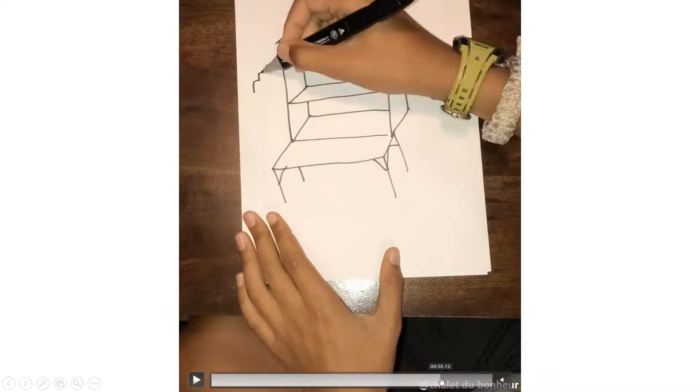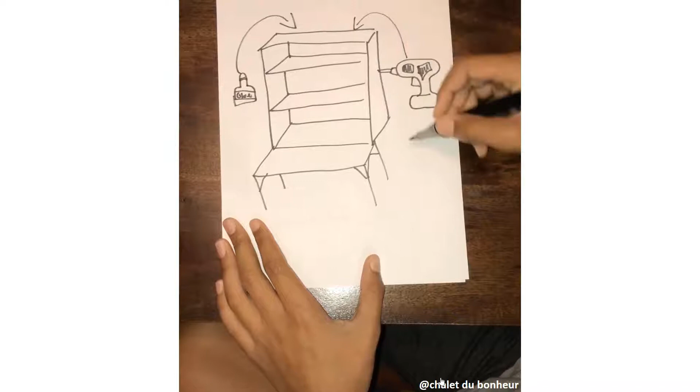Say you bought a new house and it is now time to unpack. Would you place objects that you often use or that are heavy there? I guess the answer to this is no. If I could read your mind, I guess the answer would be no. And the reason is because based on experience, you know that's not a good idea.

Well, then something pops up in my mind and I kind of wonder why we do see this type of situation happening today on workplace design in manufacturing lines and assembly lines. We do see this today, it's still there.

On the left side of things, if this happens to you at home or in the activity that you do, most probably what's going to happen is that you get a slight discomfort and move stuff around. But on the right side of things, that's a bit more serious because it's a situation where there's a high chance of developing musculoskeletal disorder, and that's a lot of money in terms of direct cost. The amount there is for the US only, so it could be up to $20 billion a year to cover the cost of musculoskeletal disorder.

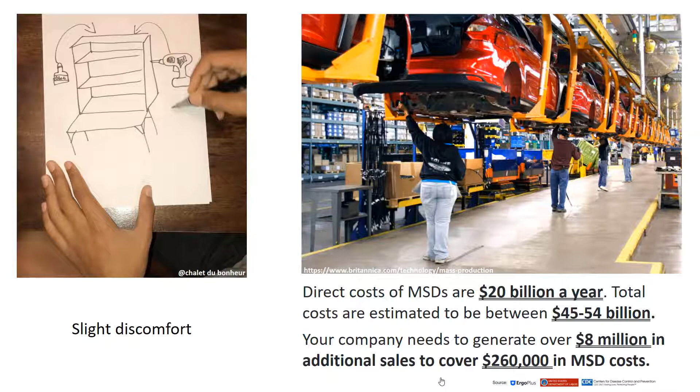So the stakes are high on the right side of the screen. And just to cover for a $260,000 MSD cost, your company, for example, would need to generate over $8 million. So that's serious, and there's something for this, there's a domain for this. It's called ergonomics, and I know most everyone listening to my presentation now, you know this.

But then to the point of asking yourself, or maybe you are, or I know I was thinking, well, why isn't ergonomics accessible while in design? Because this stuff would be caught if we would know this.

So let me tell you a story. Something happened, I did get an idea in 2012, a while back. I was supporting our actual product, and I was meeting a lot of users, and I would see them use our software. And to answer this question, why isn't ergonomics more used or available in the design, two problems popped up in my mind. I just saw them, it kind of clicked, and I understood we needed to tackle those two problems if we wanted ergonomics to be part of the design.

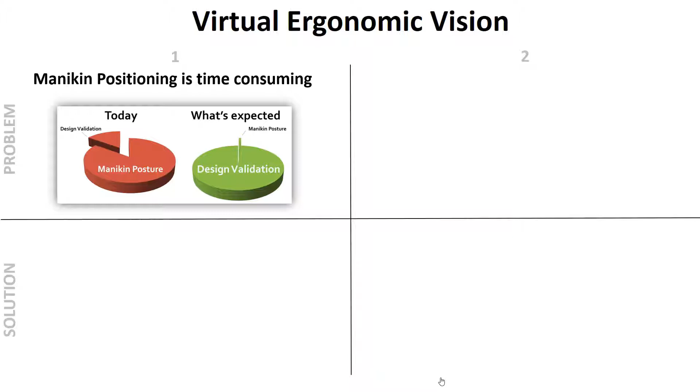And the first problem is that it's hard to position the mannequin today. It's hard to do this, and to solve this, we partnered in 2014 with the Montreal Engineering School to develop something that's called the Smart Posturing Engine.

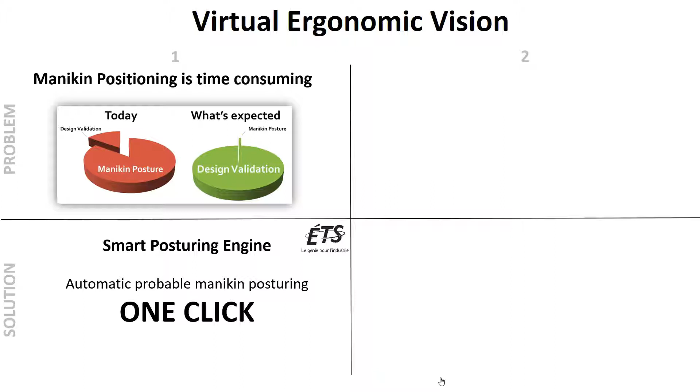Another problem that I saw is the fact that the people designing the workplace, they're not ergonomists. So they do not have an ergonomic background, and maybe you're finding yourself in there. And on the other side, the ergonomists, they mostly don't really work in 3D, or they're not part of the design in 3D. So there was a gap there, there was something wrong there. And I thought we need to do something.

And to try to solve this, we partnered with another engineering school in Montreal. And we thought, why don't we put some ergonomic guidance to learn ergonomics in the app, right there. And then if it's not enough, the user could reach certified ergonomists inside the marketplace, the Dassault marketplace. This image right there is the idea that I had in my head, something to help position the mannequin and something to help the non-ergonomists still do their job. That's where we were, and that's when the Smart Posturing Engine started and Ergo4All started.

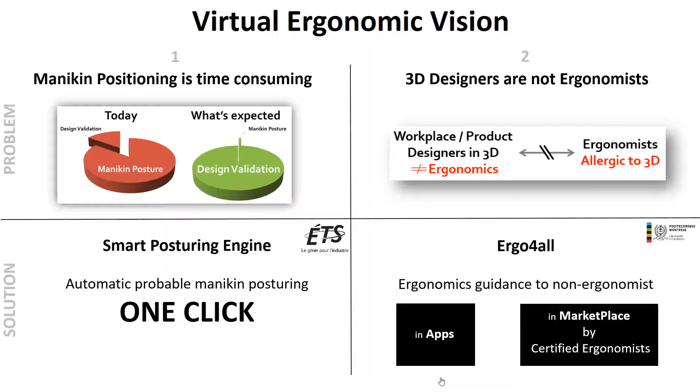These are two technologies. So in a few words, what this means in terms of the vision that we see is to bridge two worlds, the world of 3D and the world of ergonomics, by providing relevant and useful ergonomic guidance to product and workplace designers with low ergonomic background, in order to help them take quick and efficient decisions to reach their design goals.

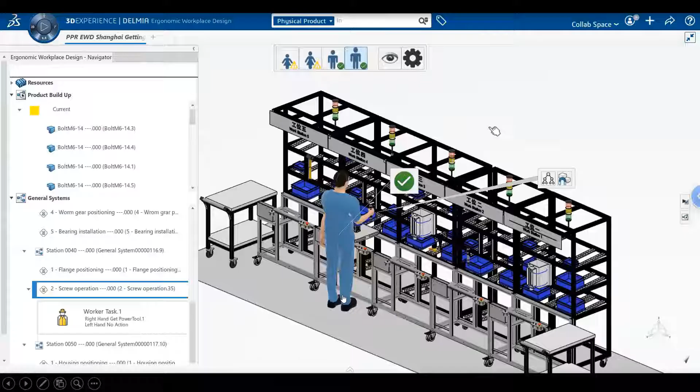This is Ergonomic Workplace Design. It's an application that helps you design safe and efficient workplaces for your workers. Let me show you how to use it.

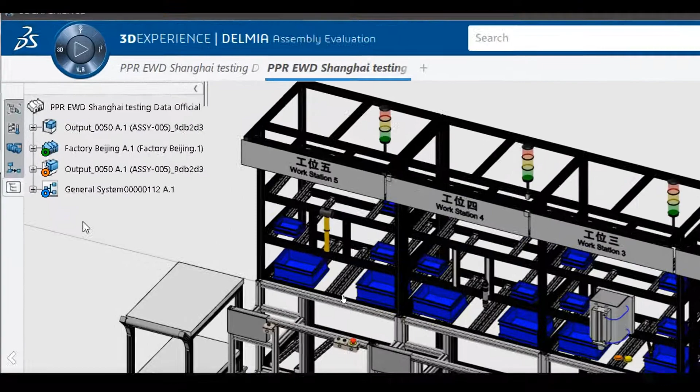First, let's take an example of a production line that we already have modeled in 3D. On this line, we are producing gearboxes. We have added all the needed resources and defined the processes to assemble the product. In this example, the process is organized by station, so under each station are listed all the operations that the worker needs to do to assemble the product. One last thing that has been done is for each operation to assign a position to different 3D parts, so our assembly model is accurate.

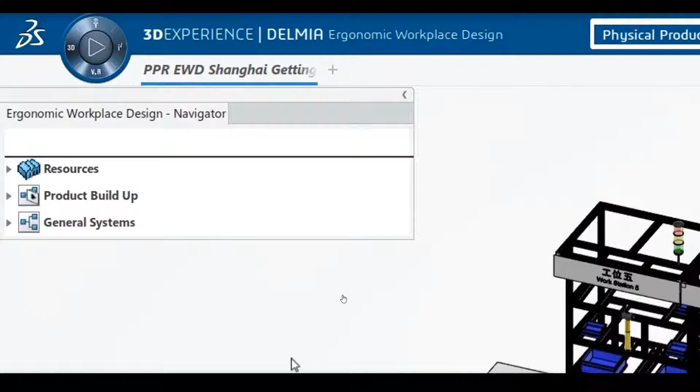From there, we can directly launch Ergonomic Workplace Design on the 3DEXPERIENCE platform. This is the interface of the application. You can see on the left a navigator with 3 nodes: a resource node, a product build-up node, and a general system node. These nodes are reusing the information of our production line 3D model. For example, in the resource node you will see all the resources needed to assemble the product. The 2 other nodes are the product build-up and the general system.

Under the general system node are listed all the operations previously created. By clicking on an operation, you will synchronize the 3D environment in the operation context with all the 3D objects positioned at their assigned location.

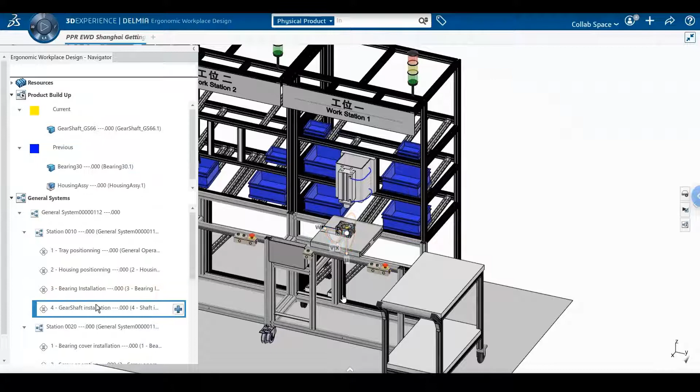Also, the build-up section is divided in 2. On top, the current section lists all the parts that are assembled during this operation. Under, the previous section lists the parts that were assembled during the previous operation.

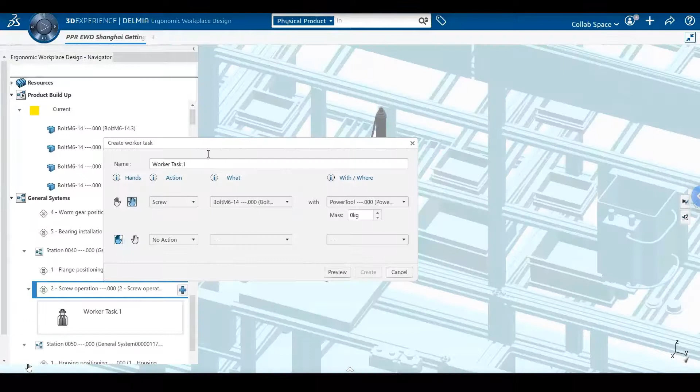Now, in order to make sure that the production line is safe and efficient, I want to simulate a worker task in 3D. Let's create a worker task in this screwing operation. I want to see if my worker can safely get the power screwdriver with his right hand. For that, I will click on the plus icon of my operation. This is the interface that will describe to the system what my worker will be doing.

It takes the form of a sentence of 4 sections. First, tell which hand to use, in our case it's the right hand. Then what is the action to perform? Here we want to get the power screwdriver.

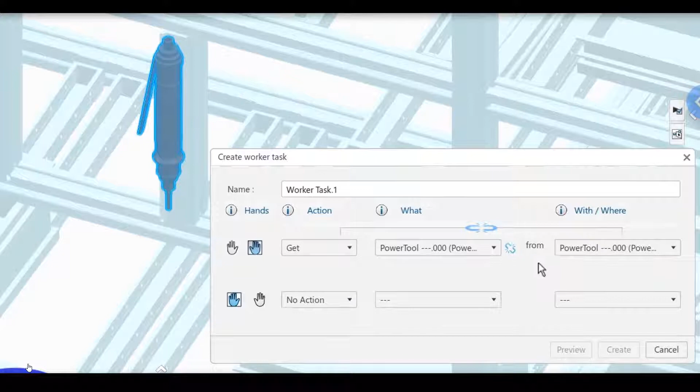You see that we cannot click on the preview button. This is because the sentence is not possible, as indicated by this icon here. It indicates that the last element of my sentence is not coherent with the action verb and the first object. In order to make it possible, I just need to change it.

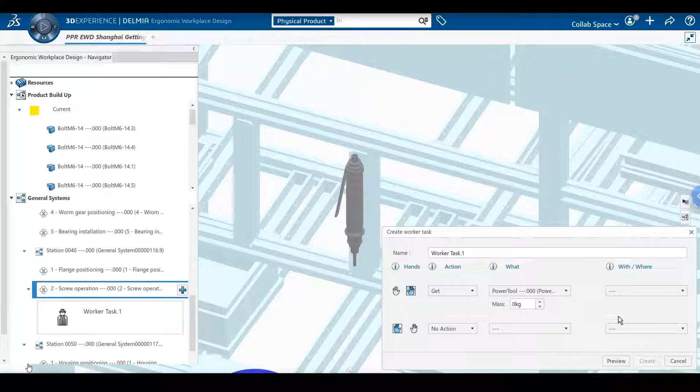You can see that by putting my mouse over the possibilities, the link icons are changing to tell me if the selection makes sense with the other elements of the phrase. In our case, I will just put nothing on the last element. Here all my links are OK and I can click on preview.

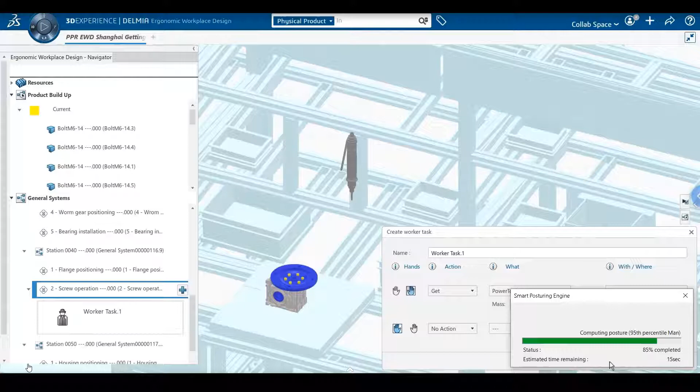Now a lot of magic is happening. While you wait a few seconds, the software is automatically calculating the posture for the mannequin and analyzing the posture to estimate the potential risk for the worker. And the best part is that it does it for 4 mannequins of different sizes. Now we can visualize the posture of the 4 mannequins to understand the potential problems.

Here we can see some risk on the shoulder, indicated by the colored dots. If I click on my lightning icon, I have a detailed explanation of the risk. Here it says that the risk is on the shoulder angle. Below are detailed suggestions to enhance my design. The first one suggests lowering the object to reduce the risk.

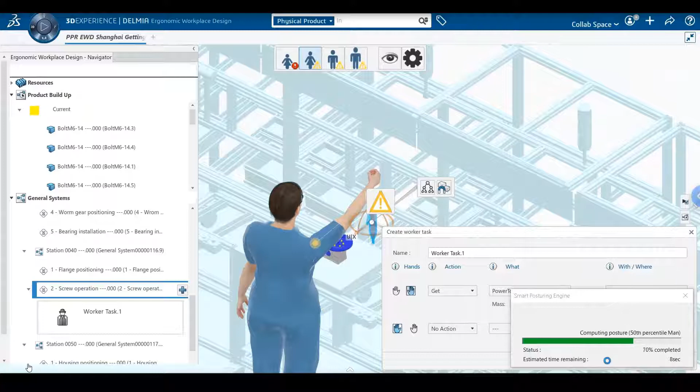Let's do it. We are in a 3D virtual environment, so this will just take a few seconds. I just have to lower my power screwdriver and relaunch a preview of the posture. I can visualize again the posture of the worker. Here I see that there is no risk on the shoulder anymore, so my design is now safer and more efficient for the worker. When I want to save my worker task, I can click on create, and the worker task is saved under the operation.

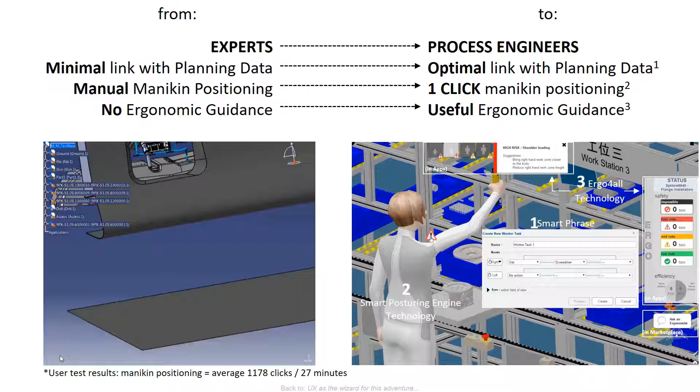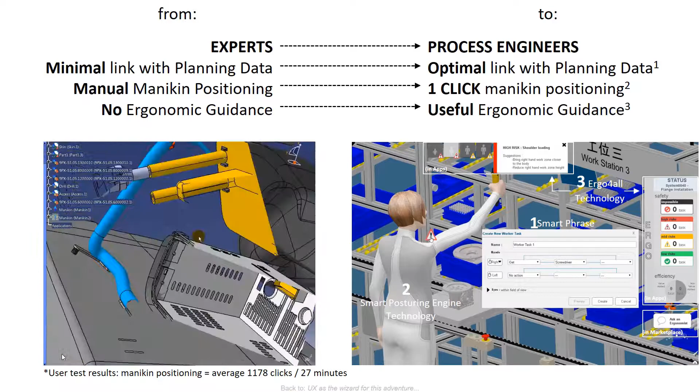With Ergonomic Workplace Design, we are going from expert users to any process engineer, industrial engineer, or manufacturing engineer wanting to design safe and efficient workplaces. We're going from minimal link with planning data to optimal link with planning data. We're going from manual manikin positioning to one-click manikin positioning. And with Ergonomic Workplace Design, we're going from no ergonomic guidance to useful ergonomic guidance.

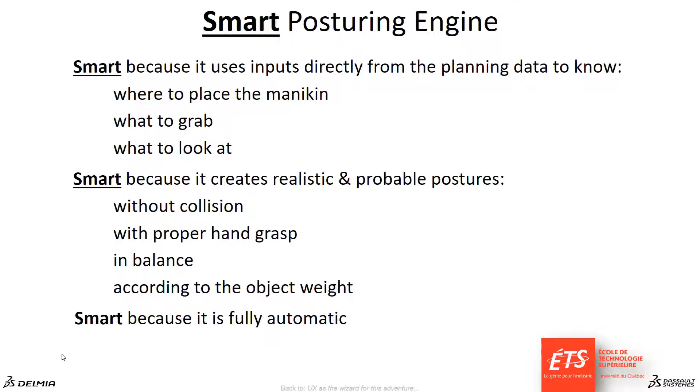We call it the Smart Posturing Engine technology. We call it SMART because it uses inputs directly from the planning data to know exactly where to place the manikin, what to grab, and what to look at. And we call it SMART because it creates a realistic and probable posture without collision, with proper hand grasp in balance, and according to the object weight. And mostly we call it SMART because it's fully automatic.

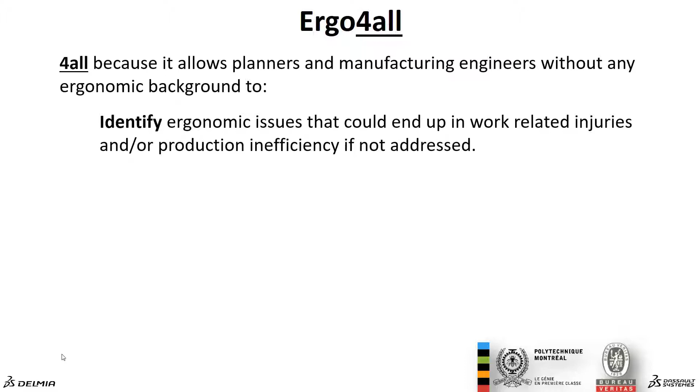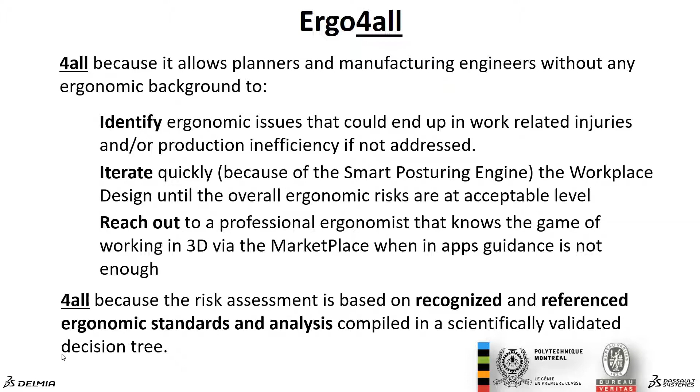And then to keep these people, we had to find the money for that. With a minimum investment from Dassault Systèmes, I was able to find funding that would allow us to keep these brilliant and bright people inside our office to help us develop the Smart Posturing Engine technology and the Ergo for All technology. And then we went ahead and created the personas.

If you guys don't really know about personas, it will be my pleasure to answer after this presentation, or just contact me, I can tell you all about that. But personas are a way to answer the question: who are we designing for? So who are we designing this product, ergonomic workplace design, for? So this is based on personas.

And we built the user stories. Again, if you want to know about this, I'd be happy to show that to you or explain to you what these are all about. And we made product opportunity assessments. Just contact me if you want to know more about these, it'll be my pleasure to give you more information.